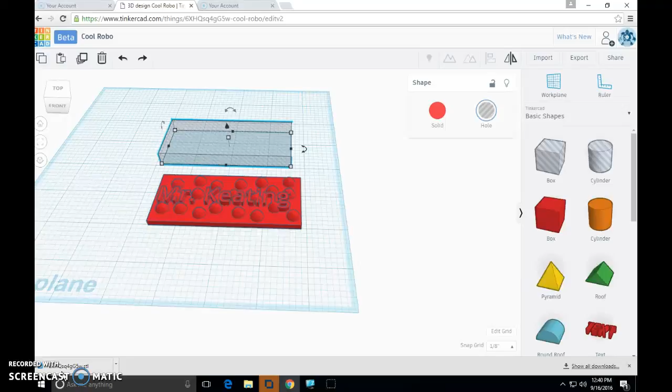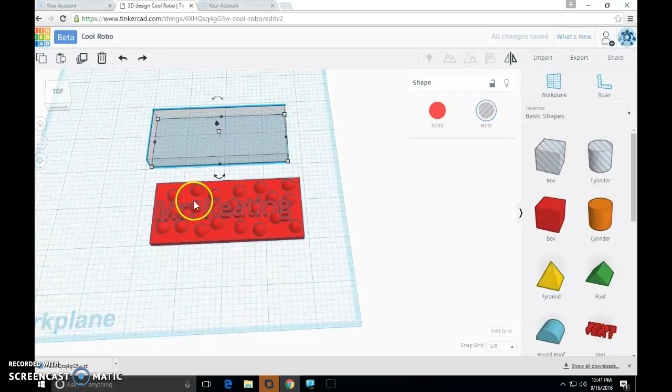In this episode, I'm going to talk to you about how to take your completed 3D lid from Tinkercad and export it so that we can 3D print it. Okay, a couple things I want us to pay attention to before we do anything. First, check out my lid here. You'll see it's all the same color. It's all red. The reason it's all the same color is it's all grouped together.

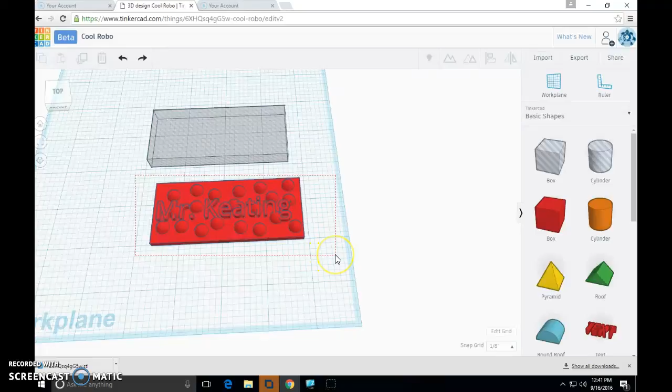These mountain tools up here, let's remember these are our grouping tools. Before we do anything on export, we need to make sure that this object is completely grouped together. How do we do that? Well, we take the arrow, our mouse, outside of our object, and we draw a big box around it. It selects the whole thing, and in this instance, I'm going to ungroup my object.

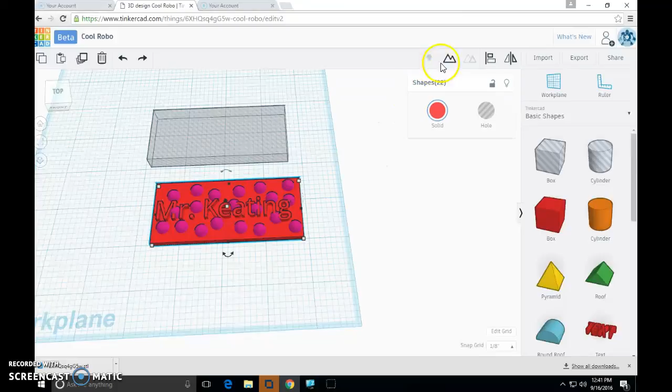Now, when I ungroup an object, look at this. This might be what yours look like. You might have varying colors, things that you can click on individually inside of your object. We don't want that. We want one whole object. So I am going to circle my entire object, and I am going to group it. If you're already here, terrific. Again, as with all screencasts, feel free to pause this video anytime so you can catch up on the work that you need to do.

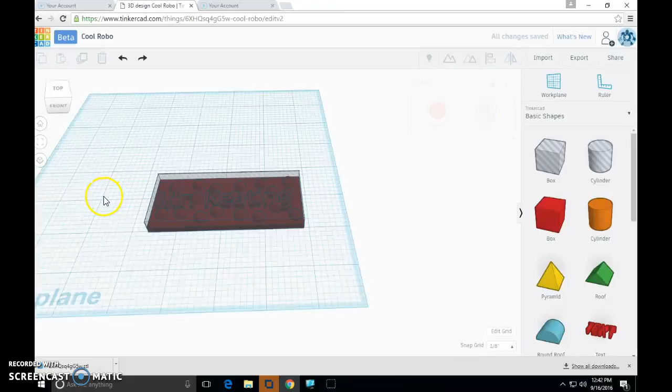The second thing I want to do is with my little sizing box here, I want to drag that onto my object and make sure that my object is going to fit. There we go. I am completely within my sizing object. I'm feeling pretty good about that. That test is done. I'm going to bring my sizing box out away from my Tic Tac Toe lid, and I'm actually going to delete this. So while it's selected, press delete on the keyboard.

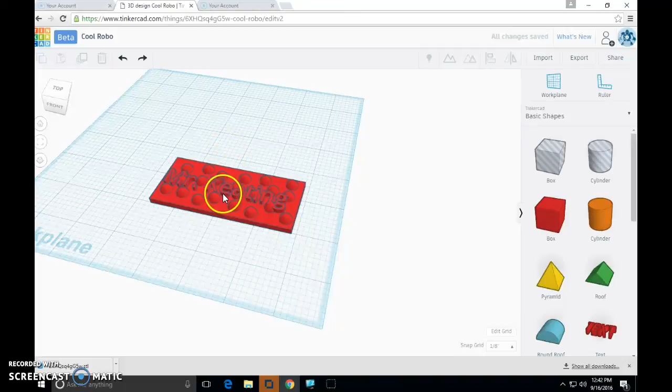If you accidentally just deleted your Tic Tac Toe lid, go ahead and press Control Z on your keyboard and it should reappear. There's always a way to undo things. Great, so I'm ready to export. Follow me. Pause when needed. You're going to take your mouse, you're going to come over to the right-hand side of the screen. Upper right corner, look for the button called Export.

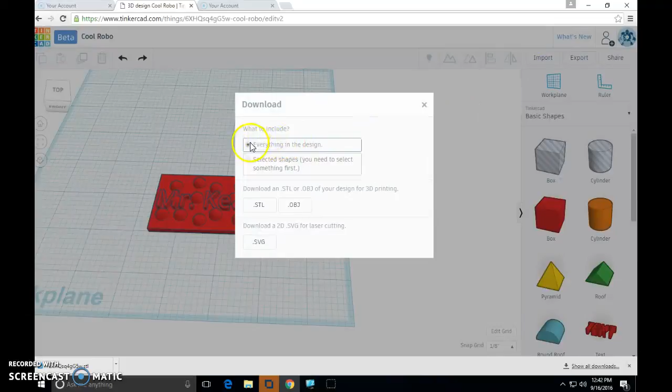Click it. We want to export everything in the design, so if this is selected, leave it there. If not, please select it. And we want an STL. So we're going to click STL. Now watch this. See this bar down here that just appeared? This is my exported file. This file name is not what I want to call it.

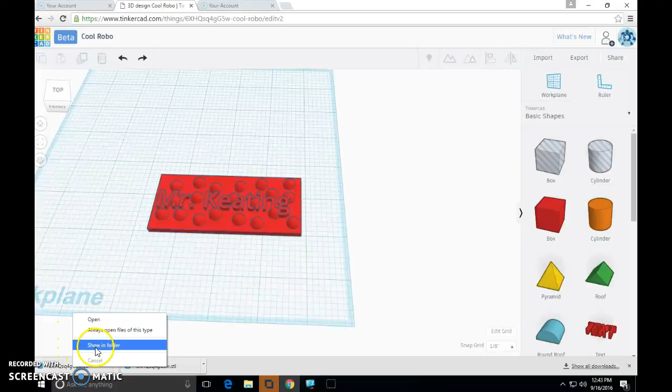So bring your mouse down here, lower left corner with me. Stay here, right click on this. We're going to click on Show in Folder. Now the highlighted file here is my exported file. I want to rename it. So while it's highlighted, I'm going to right click on it, come down to rename. While it's highlighted, I'm going to type in my last name dot my first name dot lid.

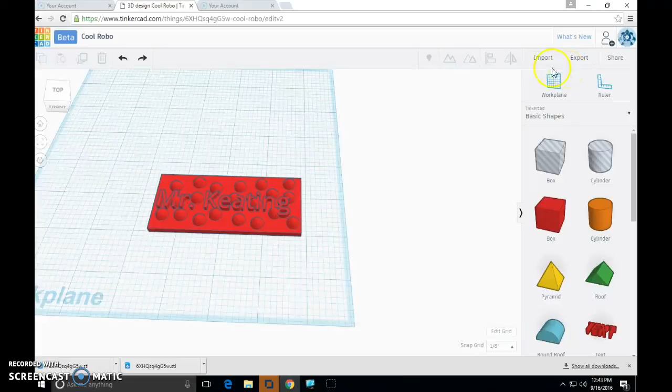Again, pause this video and do your work as needed and then keep playing it when you need to. If you have any questions, really don't hesitate to call my name out. Great, so that's done. I can close this window out. I can also minimize Tinkercad. So come up here, we're going to minimize Tinkercad. We're back at our desktop now. There's one more bit of housekeeping to do and then we are done.

Here we go. Follow my mouse down to the bottom of the screen. You should have an icon down here that looks like some files. If you sit there long enough, it's going to say File Explorer. We're going to click on that. Come up here with me to Downloads. You should see your file labeled like you just did. So here's mine, keatingquinn.lid. Click and drag this file to your desktop. Drop it right there. Leave it there.

On this box over here again, come to This PC. If this little arrow is not pointing down, click it. You see what happens when I click it? I get this big menu of stuff below it. We are looking for students. See the file down here called students? We're looking for that. Single click on that. You'll see over here I get access to the Design Tech shared file.

Guys, this is dangerous. See this file you just put onto the desktop? This file only exists on the desktop of this particular computer. We need it shared onto the main server with the school to protect it. So we're going to click on Design Tech. You're going to come over here and you're going to click on 5th grade. You're going to choose your team. I'll choose Navigator this time around.